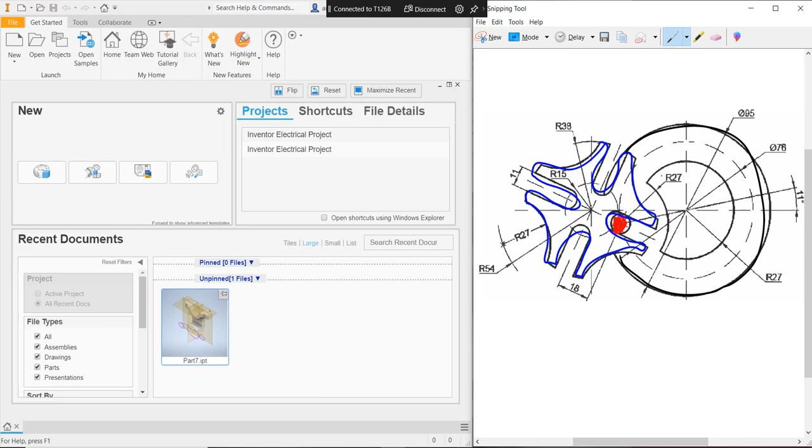This is called a Geneva Gear. We use it in engineering a lot. So in this class, I just want to show you how to build one in CAD and then how you can animate it. That'll be the last thing.

This video we're gonna call part 1 of the whole process because it's not gonna cover everything during this time that we're together. The first thing is to recognize the units of measurement that we're using.

So you can't just start here, because if we start here, it'll automatically be in inches. So in our case, we make sure we go into new. We're gonna go into metric, standard millimeters. We're gonna hit create.

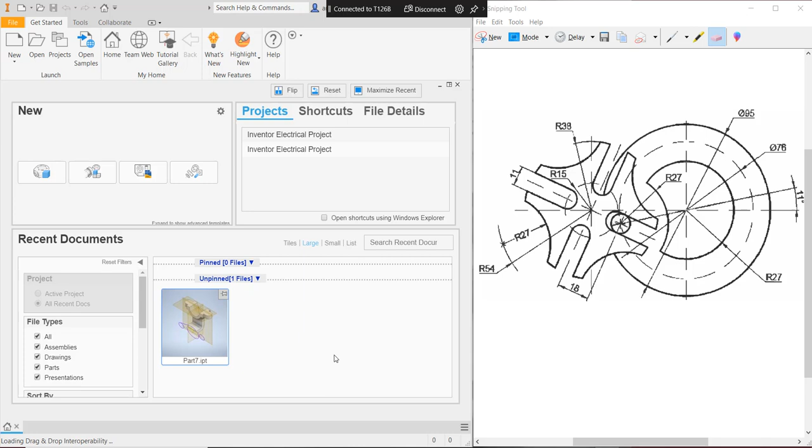Once we're inside the software, we're going to follow the standard rules of putting this thing together.

Now remember, I'm going to qualify this presentation with like I've qualified every one up to this point right now for this semester, which is be aware that there's more than one way to build anything. So please do not assume that what I'm doing is the only way to build things. All right, please?

For the first part, the only thing we're going to build is this thing, which is the back side. Got it? This is the simplest part, so that's what we're going to build at first.

So we're going to start with a new sketch. I'm going to choose to do it in what plane. I go home to find the answer to that. I want it on the top plane. Why? Because that's where I think it belongs. We can argue over that later if you would like. I'm just going to move on and draw this thing.

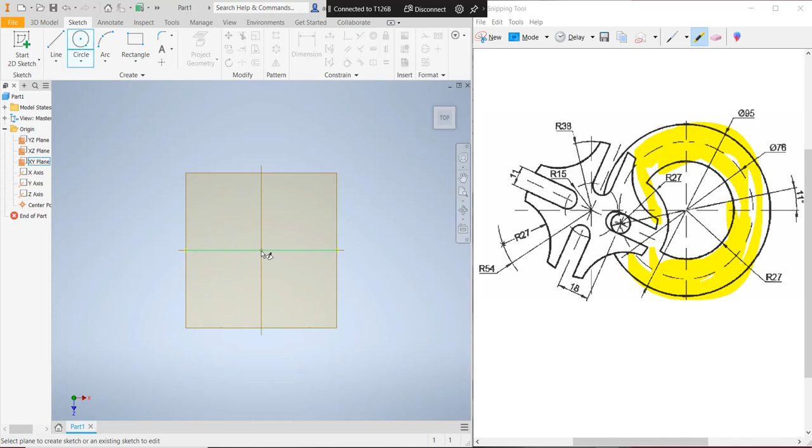So we're going to start with the circle. Whoops, pick the plane, pick the plane. There we go. First I got to pick the plane. Sorry, too busy talking. I'm going to let go of my mouse before I click the second time, because I know all I got to do is type in the value right there.

So the outside diameter is 95. Done. The beauty of doing it this way is the dimension sticks. I don't have to go and drop a new dimension or drop a dimension to constrain that object. My next little circle, that's the diameter 76.

Okay, there it is. Whoops, is that the circle or what is that? The center of my rotation, so that's not correct.

I just want to draw that inner circle. So that inner circle is going to be, it gives it to me as a radius instead of a diameter, so what can I do? I can type in 27 times 2. Remember that. I can do the math on the fly, because that's the radius is 27, and I'm done.

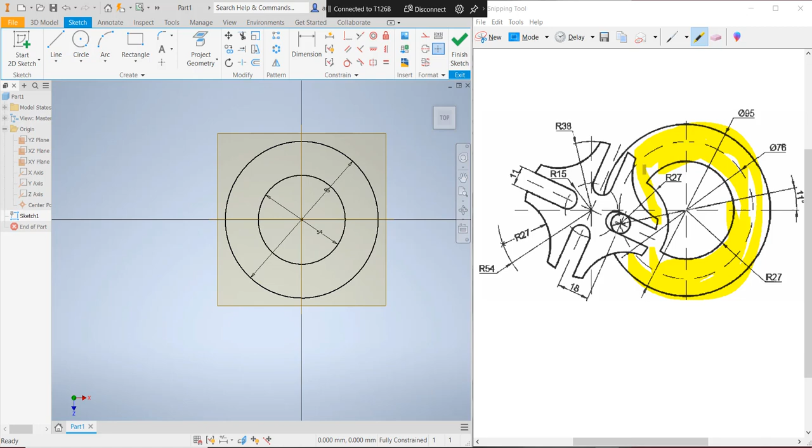There we go. There's a little curve in here with a center reference. It doesn't matter that it's off center here. See that? Who cares that it's shown off center? This center is also this center, or is it?

What do you notice? See, that center through this center, see that? Is this center. So that's okay. I can use this value of a radius 27, and that radius is defined off of that center arc, which is the first one I tried to draw, the diameter 76.

When I draw this guy in here, the diameter 76, what I need to keep in mind is that is going to be used for construction. So I'd like to click on it and pick it for construction, and that's it. That way it's there as reference.

I'm very lazy, so I'm just going to draw a circle over here. Again, I've got the 27, so that radius, and there's 27. So I'm going to type in 27 times 2. I do my math there, and there I've got my curve. Now all I got to do is trim.

Watch what happens when I trim all the way back to where it ends. See that? It does retain its dimension. See that? So it still shows it as a diameter even though it's really not a diameter, but something was lost. How do I know something was lost, guys?

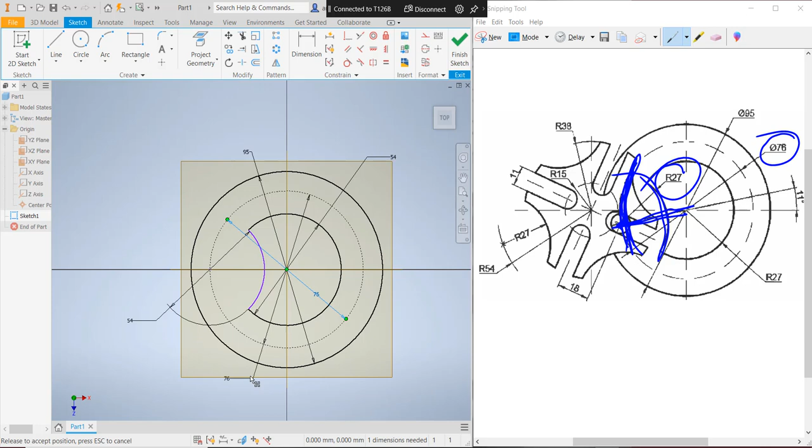Is everything fully constrained? The answer is no. Something is off. Right here, something was lost. See that? Its position in the horizontal was lost. It can be moved. See that? Still is attached correctly as far as on the right axle point. See that? But it's not horizontal. How do I fix that?

For those of us who want the detailed drawing of this thing to be spot on, I would add a new item as a construction line, and then I would identify this to be what? Horizontal. What happened? It went horizontal, but this object didn't go with it.

But watch now. Do you see that constraint visually on the screen where you see the little X, the arrow to the other X? Do you see it right by where my crosshairs are? Very close. It's a tiny little symbol. You'll see it in the video. When you let go, boom. Now this is locked in place.

Okay? Now you're going to ask me, why didn't I put the pinhole in there? What can I put in there? I can't put the pin in there unless I machine it as one part. We're not going to machine it as one part. For those of you that want to build this, that's an option. We're going to actually build it.

What is the diameter of that? The diameter of that is this. Whoops, I'm using the wrong, there you go. The diameter of this pin is that number, 11. That's in 11 millimeters. So 25.4 millimeters equals an inch. Half of 25.4 is what? Or half of 25, when you think about it, is what? 12 and a half, roughly, in round numbers, yeah? So 11 is a little smaller than what?

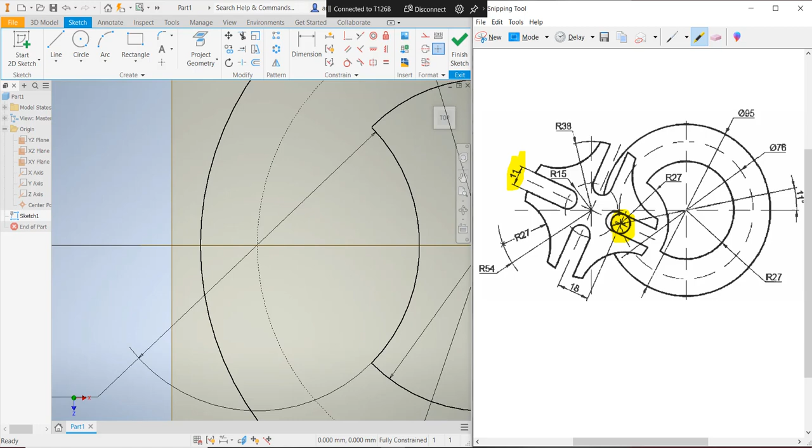Half an inch, yeah? So we'll find out what modifications we'll have to make later for those of you that want to build this, because that's going to be part of this project, actually building one of these. You'll be able to build this in the shop from this class, Inventor, because we have access to that laser, all right? Because I want you to see that the dimensions you put in the software package do actually matter. It's not just for fun, you know. These dimensions translate into real physical product, okay? That'll be next for this class.

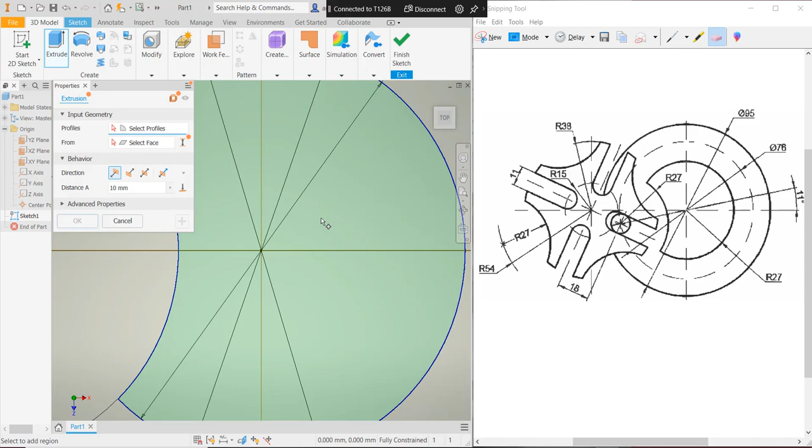So for now, because we are going to be putting a pin in there instead, a dowel, to be specific, a little dowel. My dowel collection is next door, and we'll find the right dowel for this thing. I am going to identify that that's a diameter of 11. That's it. That builds this part at this point, okay? Of course, we're going to come up with some other problems later when it comes to build, but we'll discuss them when we're at that conversation, which will not be recorded because it's got nothing to do with just the Inventor itself. Now I'm going to pull out, and there we go.

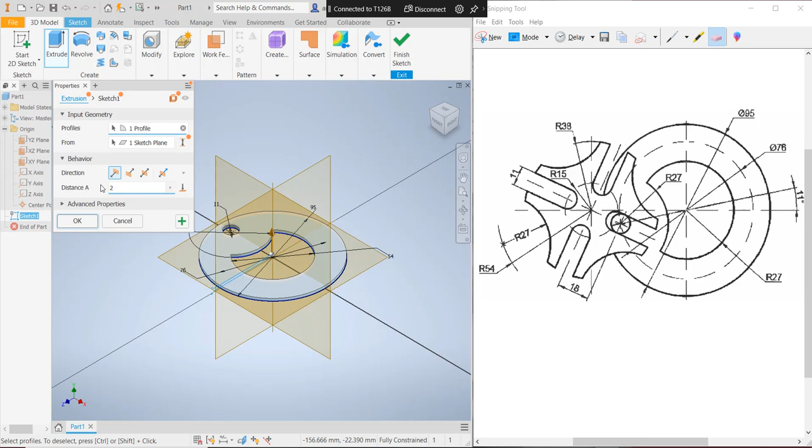We've got the shape. I'm going to go home. How thick do we want to make this thing? We are going to make it the thickness of the material we have access to. I haven't had that conversation with you, but for the sake of just getting through this conversation, we'll make it 2 millimeters thick. That's it. Just for fun. 2 millimeters, put that in your notes. It is thin material we're going to make this. We're going to make a small little Geneva Gear. That's it. That's all you put in this thing.

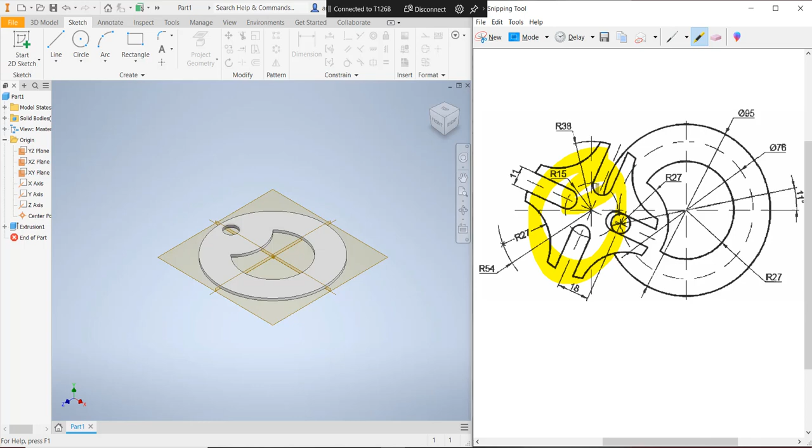If you start building this shape in here, if you do that in there, sorry, my arrow can't go all the way across. If you start doing that, you're in trouble, because this is a part file, not an assembly. Okay, all we drew is one part. That was it. End of conversation. We're done with this part.

We hit save because we save everything. Do not delete it, please. I'm going to save it somewhere I can find it again. That's another thing. Make sure with file management you put things in the right spot. So pay attention to where you store things. Okay, in this case, I'm going to create a folder called Geneva Gear.

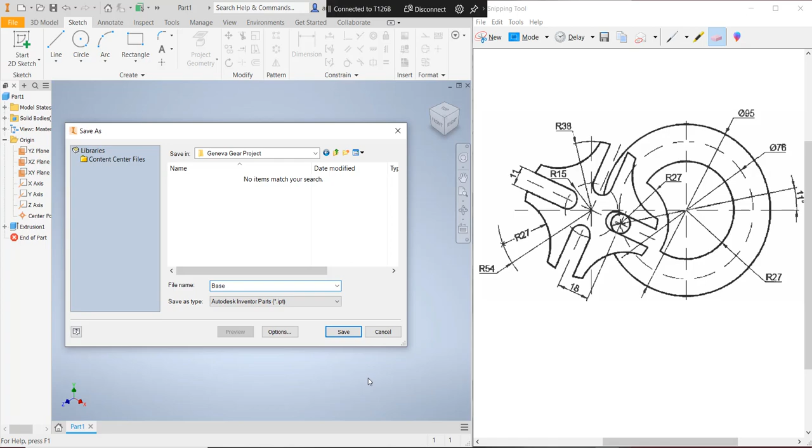Okay, so I'm going to throw it in there, and this is going to be the base. Okay, but you want to give everything a name, a logical name. Then I get out of this thing.

Okay, the next thing I'm going to do is go to New. And instead of picking a template for a part file, I'm actually going to go for an assembly file. Now you'll notice in assemblies we have all these different choices. We're not doing a weldment design. That's for a different class. We're going to do standard.

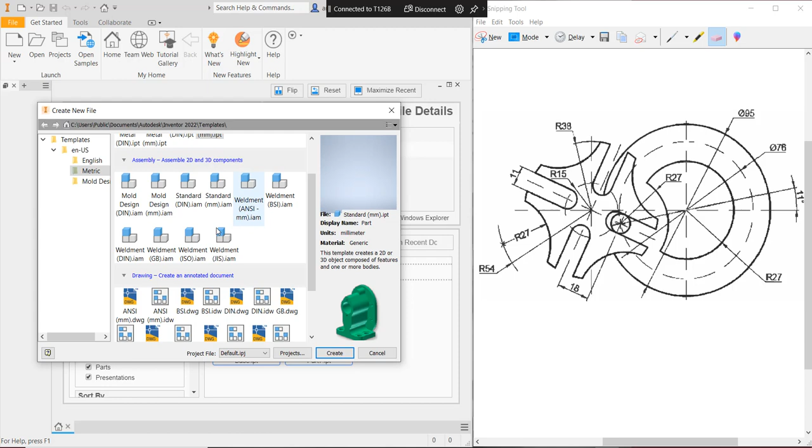Okay, weldments are when you're welding stuff together. In our case, this isn't going to be a welded project. So I'm going to go to a standard. It's going to be metric, okay, millimeters. There's mold design, but this isn't the mold either. So that's why I went straight for standard. We're going to hit create.

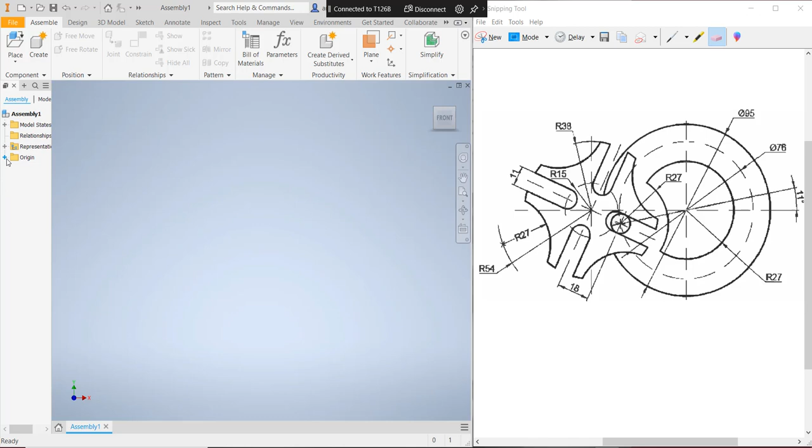When you get into Inventor and it wants to create something, it does absolutely nothing. If you were in a product called SolidWorks, it would ask you to import parts. Inventor asks you nothing. It just starts like that, and you need to know to do what you want to do. First thing I recommend, as always, is to turn your planes on so you know where in space you are, because we don't want to be lost in space. That's a TV show, not for here.

So they have all the same options. I wanted to click them each individually so you could see them. And then visually, it looks the same as if you're in assembly. I'm sorry, as if you're in a part file, doesn't it? Notice that? Looks the same. It's not, but it looks the same.

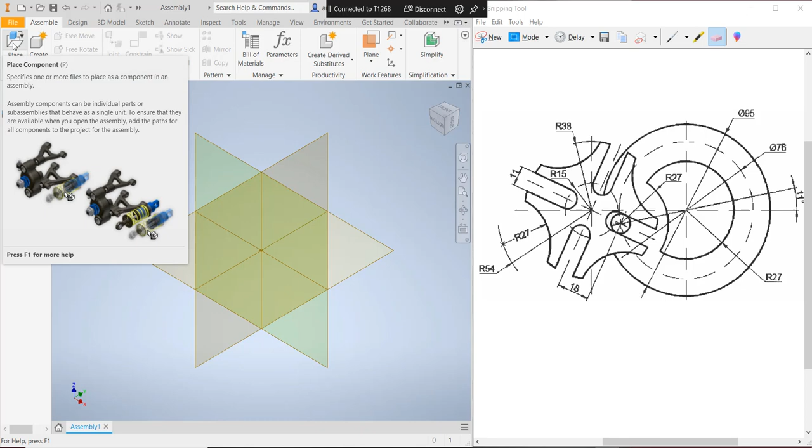Place and create. This is the fun part, okay? I could have started in assembly and created my base in here. I started the other way. I created a part like most people will do. I want you to place your part, which is the base, into your assembly. And you just drop it. Now notice how it wants to drop it. See? I want to drop it this way.

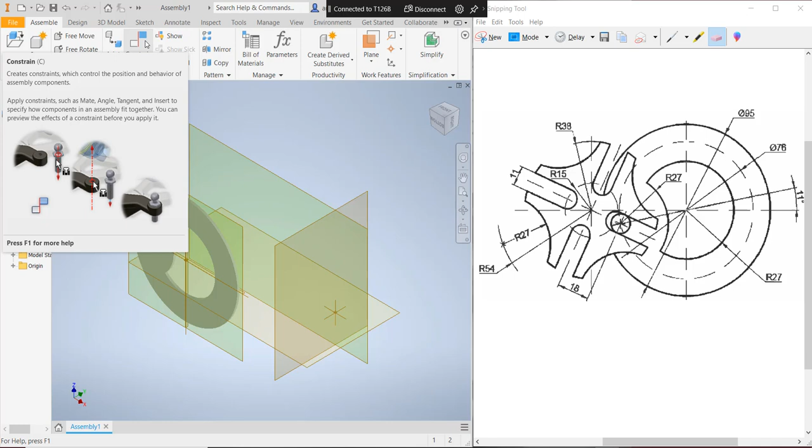Can I change that? Model States, origin. Can I change its position? The answer is yes. You have an option of constraints where you can constrain this object to its new environment. So do I want to pick the plane of the object or the face of the object? I've taught you mostly to pick the face. So I'm going to pick the back face of the object. That's why I'm going to suggest it that way. Just like when you start a new sketch, I ask you to start it off the body.

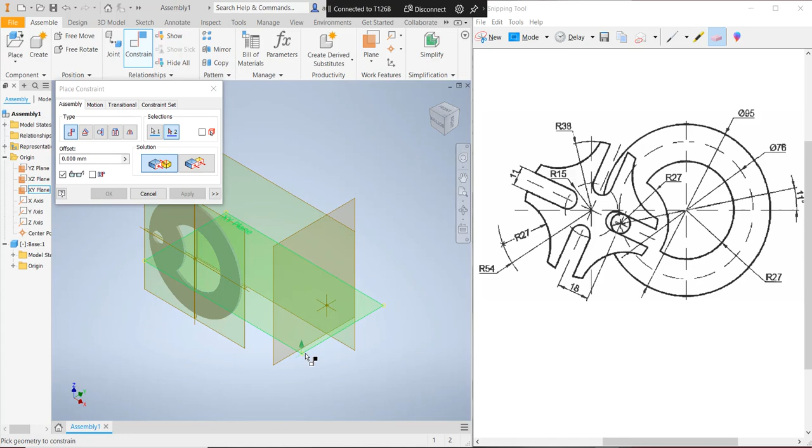And then I'm going to pick this plane, and boop, it drops it on that plane. You have the option of how it drops it on the plane. See that? Align, flush, or mate. And what it's doing, if you look at the object carefully, when you see little shadows on it, it's moving it one way or it's moving it literally upside down. It's hard to see because this object is pretty static in appearance, right? But that's what it's doing.

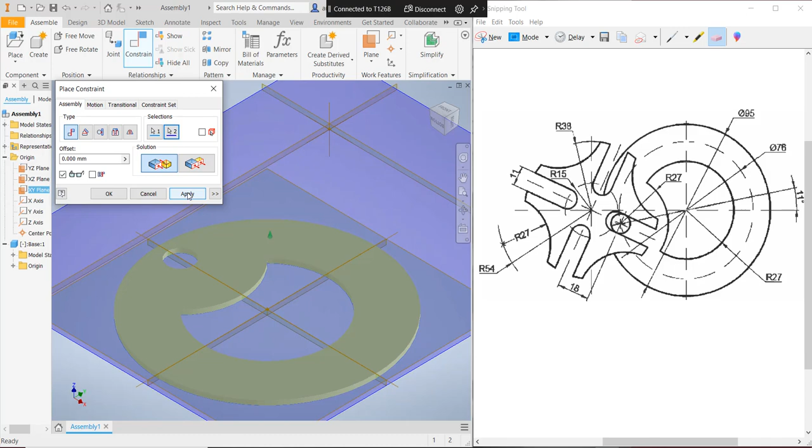I can hit apply, and now this object is stuck on that plane. I can move it here and it looks like it moved away, but you notice what it's doing? Whee! See, the plane is going with it. You see that? That's literally how this product operates. This is movable.

Hear that noise? On the surface. I cannot lift it off that surface. I tapped on it for the purpose of just telling you I'm on a surface. That's my mouse. If I want to lift it off the ground so I can do this kind of noise, because I have to pick my mouse up and put it down, I can't. I have to unconstrain it. I have to take this mate away. Right now it's mated, stuck to that table. Got it? To that plane.

If I want to constrain it dead center, I can. I can go into constraints. I can pick my center axis and my center axis and lock it into the center. Guess what happens when I do that? Anyone want to guess? I locked it to the center.

Anyone in machine design or jig and fixture design or fluid power? What's going to happen? What do you think is going to happen? I can do what? Rotate it. I can spin this puppy around. Whee! See that? Cool. Isn't that awesome? That is step one of automation: make sure that when you bring your parts into assembly, you constrain them in relationship to how they move.

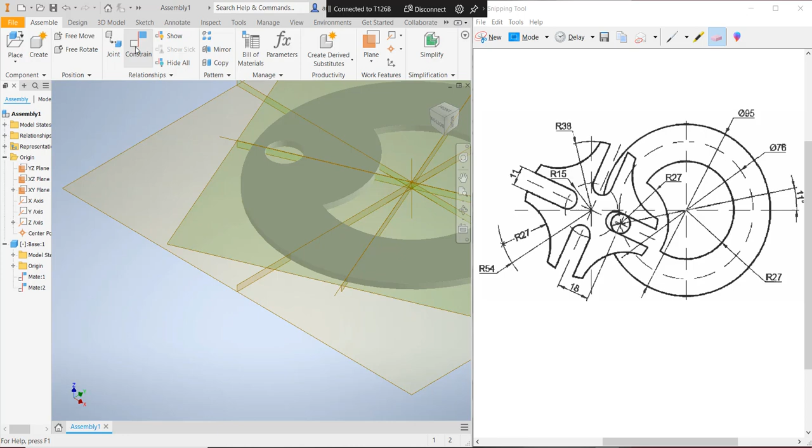All right, so if I do it right now, I'm going to go to constrain again, pick this plane, okay, cool, I locked it in. Now if I don't like the way I locked it in, I could switch that and say, no, I want to lock it in on that side. Why? Because that's where I want to draw the star. Random decision. Get it? Okay, I just chose a way to lock it down. I could just as easily lock it down on the other side or lock it down at 45 degrees.

I don't care. Cool? And if you're going to ask me, what do you mean 45 degrees? I could lock it down by angle. And like I say, I wanted to lock it down at 45 degrees. See? Boop. Rotates over. Got it? Okay? You can decide how to lock it down. I'm going to lock it down straight. Whoop, I got to pick the side.

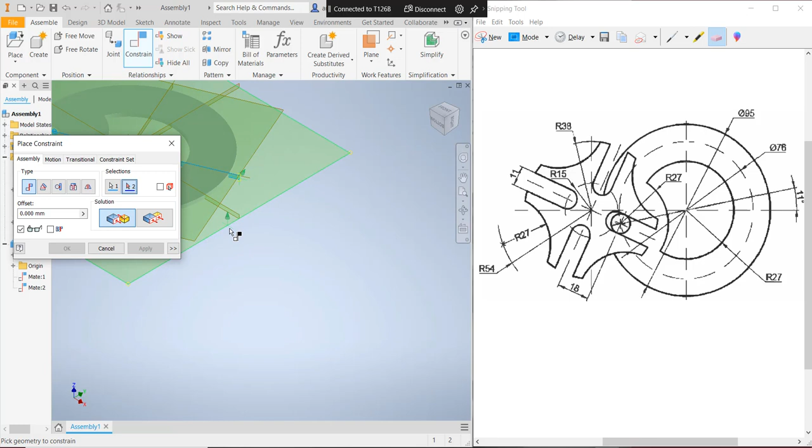When you want to pick a plane, you got to pick the edge of the plane. It gets really confused if it sees other stuff. So your goal is to find where you can just pick the plane you want to activate, and here we go. Whoops, I want to activate it to that plane. But do I want it that way or that way? I'm choosing that way. Random choice, by the way, not a required choice. There you go.

So now I'm in assembly. What's different in assembly is you've still got the model states, relationships. Relationships are different. That tells me all the different mates I have in my drawing. Representations, different views. Origin is the same as if it was a part file, and then voila, this is a base. It's all about the base, remember that.

Just joking. For you musical people, you know what I'm talking about.

So there you got the base. Model states. Whoops, let me pick that. Master and whatnot. And then origin, meaning where is it located, the usual. And then you've got your mates. So your mates will appear with their part, and all the mates will appear up here in relationships. All the mates pile in here. Okay, and the mates specific to a particular part appear with their part. Got it, guys? Please remember that.

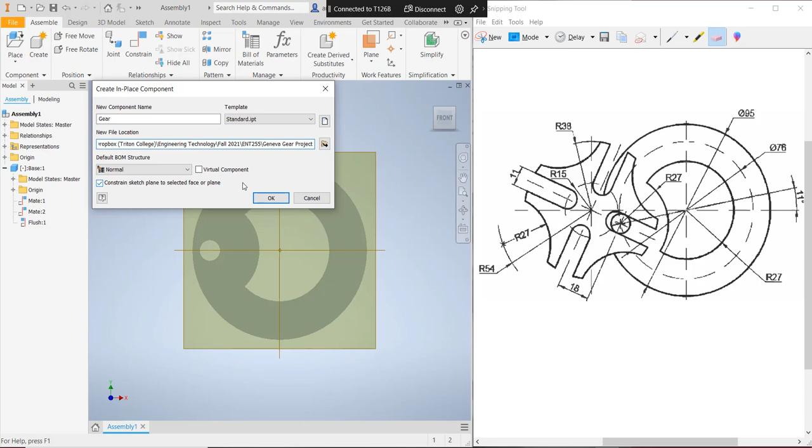Then I'm going to go and start the next part. So this is new, so I'm going to create a part. Okay, and I'm going to call this part the gear. I'll just call that a gear. It wants to drop it in the same spot that my file exists, so make sure you have a place for it to go, a good home to go to. I'm going to hit OK, and then it's going to ask me, where do you want to create it? I'm going to pick this face.

Okay. Now here's where the fun begins. Why am I wanting to show it to you this way? I'm going to start a sketch. I'm going to pick that face to start my sketch. And I've taught you project geometry already within a part file. Now I'm going to teach it to you within an assembly. That's why I did this. Whole purpose of doing this.

I'm going to actually project geometry from my other part. Okay, very important. I'm doing that so that you understand you can build one part from another part. That's the important part of this learning experience right here. You'll get a hot and cold symbol. To me, because I came out of the HVAC industry, I see HVAC symbols.

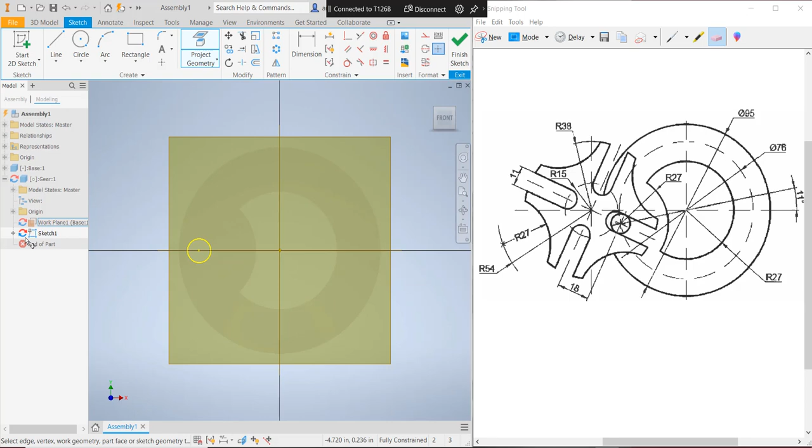Red arrow, blue arrow, yin-yang style, right? Right out of the HVAC system. What it really means here is that they're hot linked together. Got it? When one diameter changes, guess what's going to happen here? The diameter in this part's going to change. That's what this means. Now I can draw the rest of it.

Let's see, what is the rest of it? I want the basic shape, right? So I'm going to go somewhere out here and just draw, whoops, draw a circle, excuse me. I'm going to reference off of there and draw this circle. So what is this? Is this locked in correctly? Whee! No, it's not. What should I do?

I could draw a line from here to this object, make this a construction line, and then apply a horizontal constraint. Got it? Now, dimensionally speaking, what am I looking at? When I look at this line, where does this object align with this object? No clue. Or do we have a clue? Are they the same diameters? Are they different diameters? What do we know? What don't we know? Any suggestions?

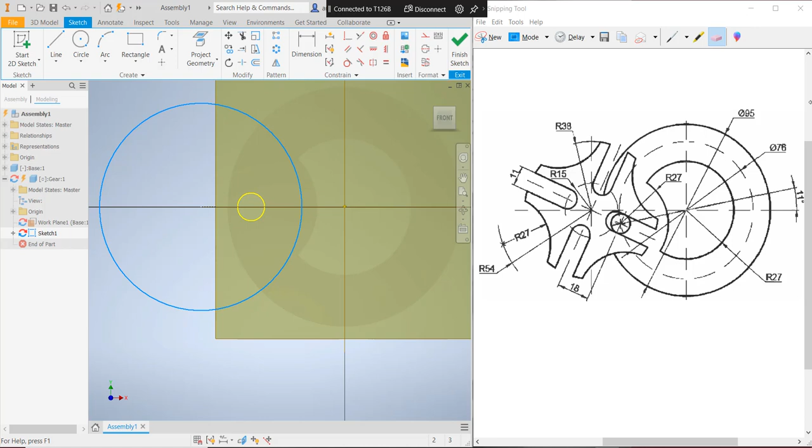Yeah, the dimensions are right there. A radius of 38 is the outer dimension, right? So we could just, that's the easy part. We can assign that. Uh-oh, what happened? I'm in my assembly and I started a new part, but what units of measurement did it start it in? Dun, dun, dun, dun. Inches, do you see that?

How do I overcome this potential problem? 38 millimeters. No. Was that correct? Is 38 millimeters correct? It is, except for the fact that it's 38 millimeters times what? 2. See that? But it's giving me the dimensions in inches. You notice that? Okay. Remember I told you units of measurement. So where do I fix that?

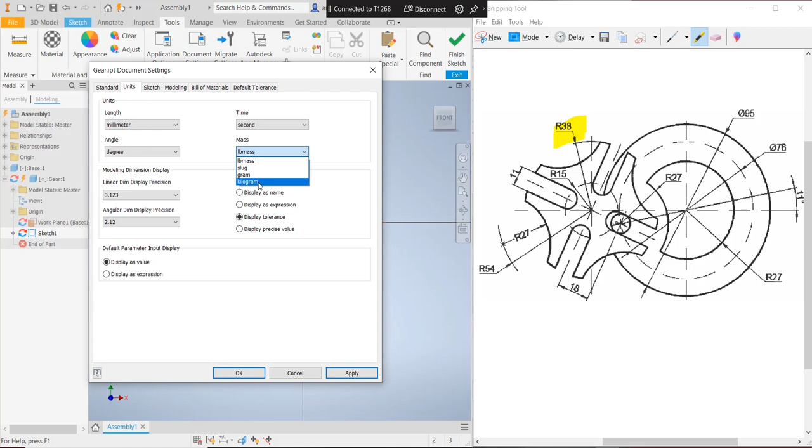Tools, document settings. What units do I want to represent everything in? I want to say millimeters. Do I want the mass in pounds or kilograms? Kilograms, got it? Be mindful of these oddities. You can still move along, no problem. Get it? But I need you to be aware of these issues.

Now I can actually complete my cut. See that? Because everything now is positioned correctly. When I do an extrusion this way, I'm going to do this intentionally like this so I can show you what it's going to do. Do I want to extrude this cut in this shape by just one cut and then try to pattern it? No, I would not. What should I do? Should I try to pattern it in here? Or should I draw the basic shape and put in the cut as a secondary feature? What do you think? Any thoughts, any opinions?

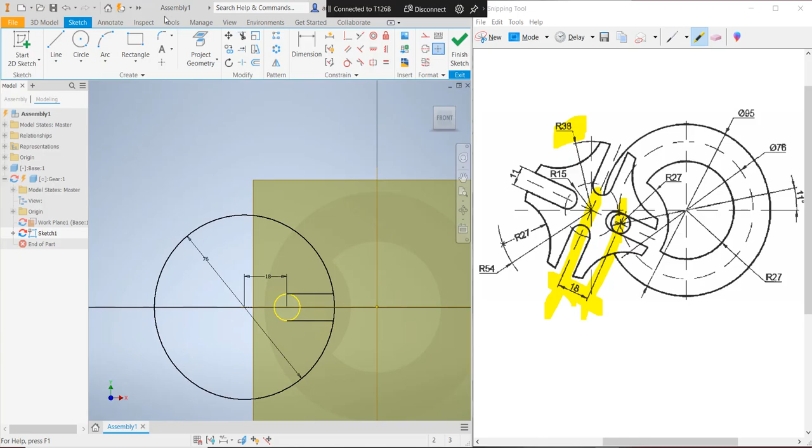Now it's tangent. Now I can actually do something called what? I haven't used this with you guys in here, but you may have used it in other software products. I have to maximize this real quick to do this. Thank you. Just so I could see everything. Circular pattern.

Inside a sketch, circular pattern. I'm going to pick the objects. But it won't let me pick the, darn it. So what should I do? What do I do with this object? Nothing. Just draw right over it. Got it? Don't have a heart attack over it.

No, it doesn't let you. That's okay. Why won't it let me? What is so special about that object? It is the hot link to the other object. So when I trim that, it just sits there. Okay? Now let's try it. Circular pattern. There you go. See? Lets me pick everything.

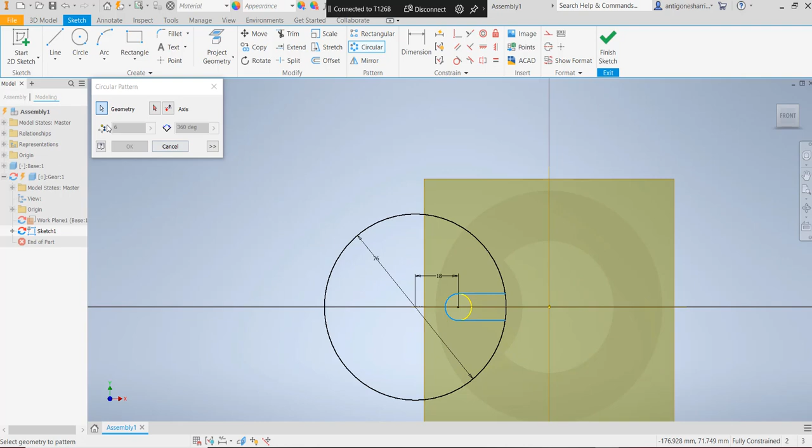Cool? Okay. Let's see. That's the objects. So I pick the geometry. Now I'm going to pick the center. Whee! Now how many? A 1, a 2, a 3, a 4. 4. Whoops. Why does it keep changing it to 6? Oh, because I don't have my number lock on.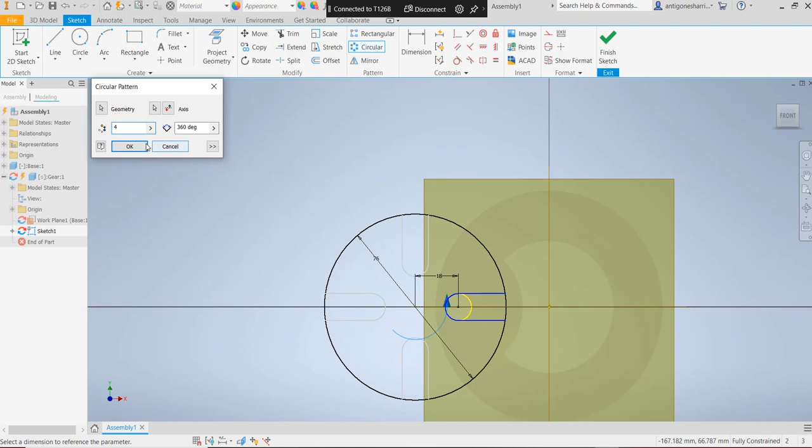Now I type in 4. Cool. There you go. And I hit OK. Yeah, I could trim those in, and I will, the trim back part. But I also have those little curves. Where are the curves? Should I have done those at the same time? Yeah, I should have, right? Which is these guys. These little curves. See those radius 27s?

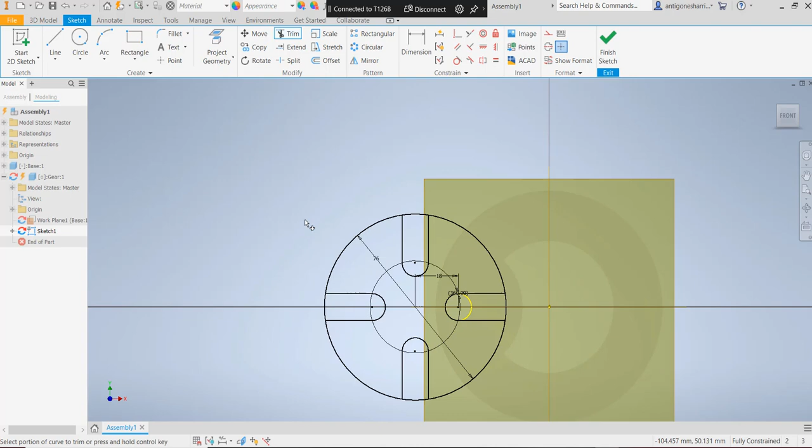Now, how do I find where those go? Let me trim these back real quick. Like I told you, there's more than one way to build this thing, so I'm just showing you a way, not the way. What would I do if I wanted to build it as part of this and not separately? I would attach to this. I would turn this into a construction line. I would draw a circle.

Should I have stopped that line all the way over there, or should I have gone further?

Anybody want to give me their 10.5 cents on this? Inflation is why I say 10.5 cents, you know. It's no longer a penny for your thoughts.

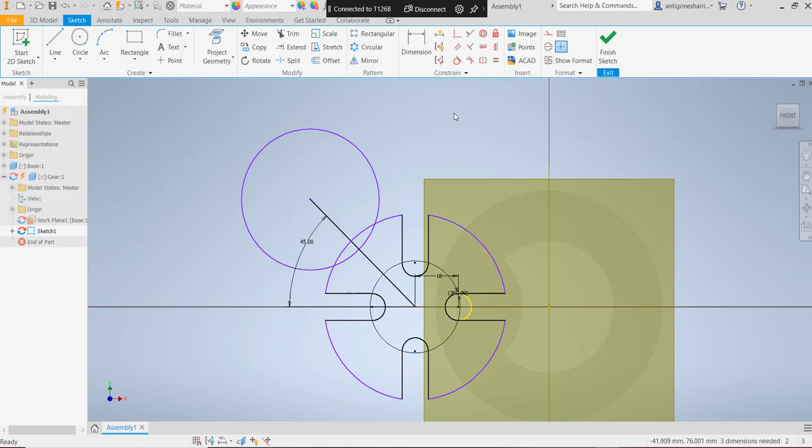So I'm going to go from here to here. This I'm going to set to 45 degrees. I'm going to draw a circle out here. I'm going to go this way. What's the radius of that circle? 27. So it's 27 times 2 because it's a diameter out here. Whoops, that's far away. So where does it belong? A radius of 54 through its center, but where is that center?

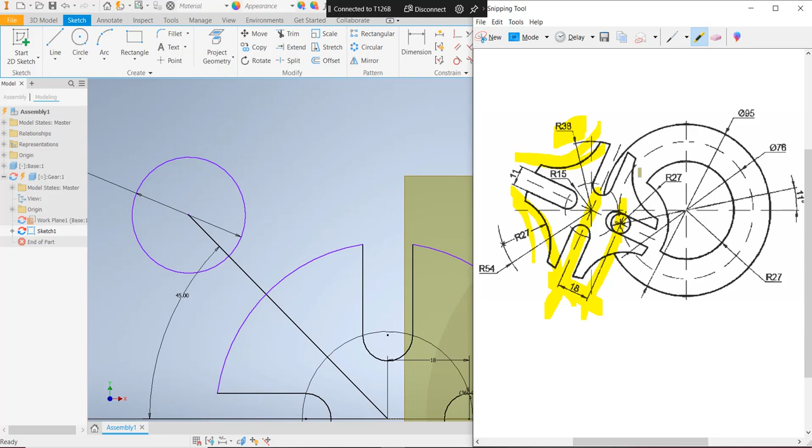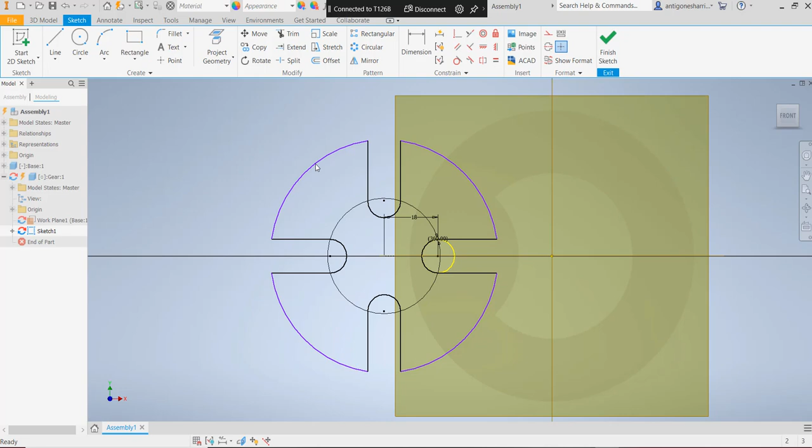Anyone want to guess? This location is directly correlated to its partner, which is this guy. This guy. But we built it like this. Darn it. So what can we do? We can extrude this. A few things we could have, should have, whatever. We can talk about it till we're blue in the face.

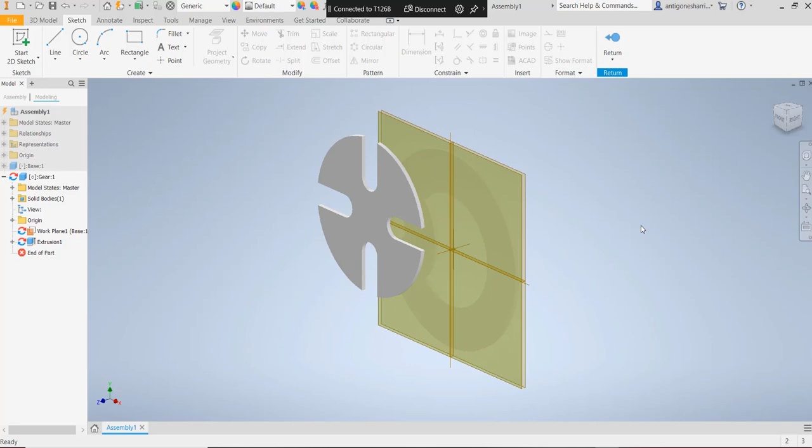What did I make the other one? 3 millimeters? 2 millimeters? 2. Okay. So I'll make this one 2. So now we have 2 parts. And the last part is actually a product of the 2 facing each other a specific way. We literally have to rotate these 2.

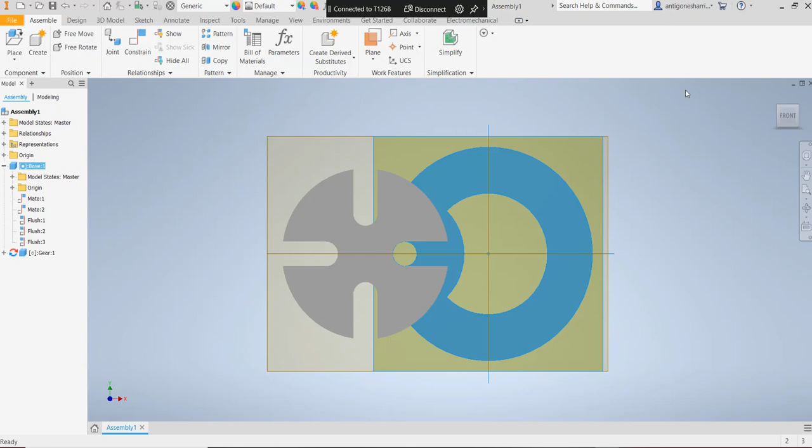Okay, so if I get out of my part file, remember this used to rotate, or did I lock it in place? What did I do? I made it flush, let's see. Remember how I initially showed you this part rotates? So this was flush. That's flush. It was that one. I got to remove this so that way I could rotate.

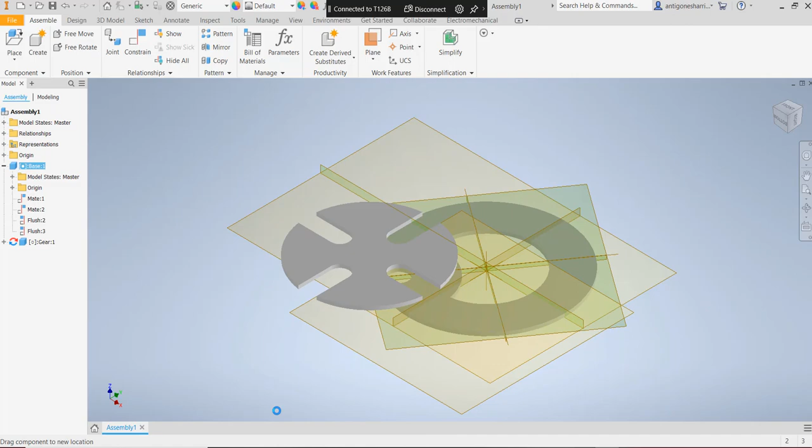Whee! See that? Is that not gorgeous? It rotates the wrong way, but it's gorgeous. This guy is stuck to it. Notice that? Is that really what I wanted? No. Why? Which piece is supposed to be spinning which piece? This piece is supposed to be spinning this piece.

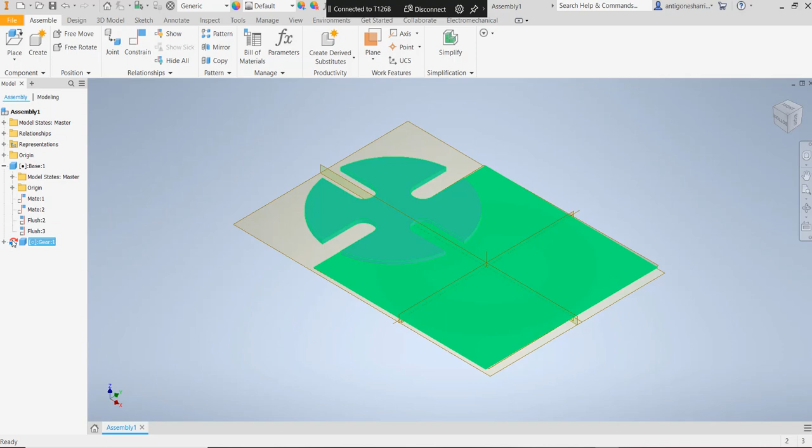Okay? So I'm going to stop the lecture at this point, but the one thing I'm going to show you, and maybe you can figure this out for next class on your own, that's up to you. But the first answer to fixing this problem is to turn off the adaptive feature. The adaptive feature is literally the hot-cold symbol.

That's the adaptive feature. Once you turn that off, then this will move freely on its own, and this will just move on its own as well. Okay, that's step one to the solution. The next part I'll show you next class, and this will end this lecture for today.